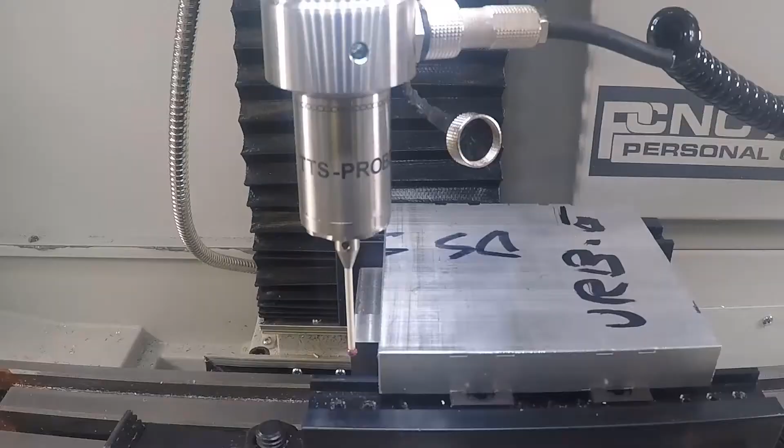Hey guys, I want to give you an update on the SOLIDWORKS part you sent over this morning. First, thanks for being a new customer. We really look forward to working with you guys on a lot more projects in the future. So I've got some good news. Your parts just left final inspection and they're headed over to shipping. We're able to cut your 2-day turnaround requirement in half. Your parts are scheduled to be picked up by FedEx later this afternoon, and you should have them sometime tomorrow.

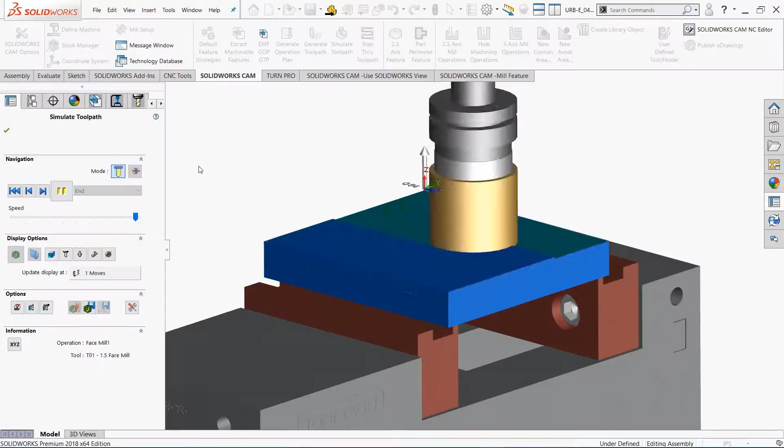So, by the way, thanks for sending me a SOLIDWORKS part. We use SOLIDWORKS for just about everything, and that includes CNC programming. When we get a SOLIDWORKS part, it really makes a difference in how quickly we can turn around a job. Hey, why don't I share with you some of the latest technology we use to get our jobs completed on time?

Man, this shop can be really loud. Give me just a moment, and we can continue in my office.

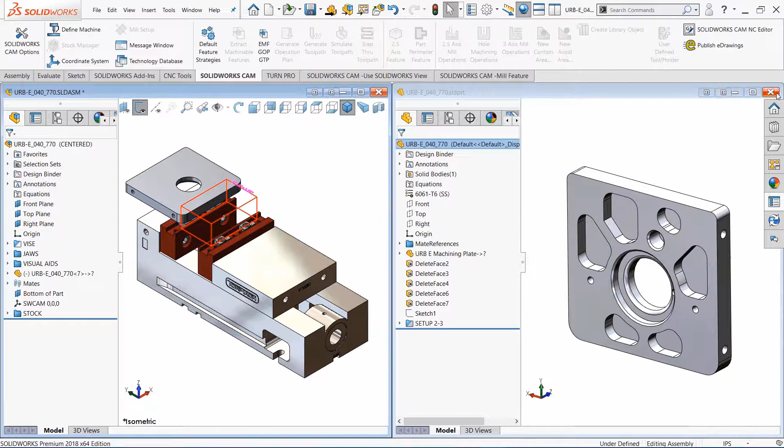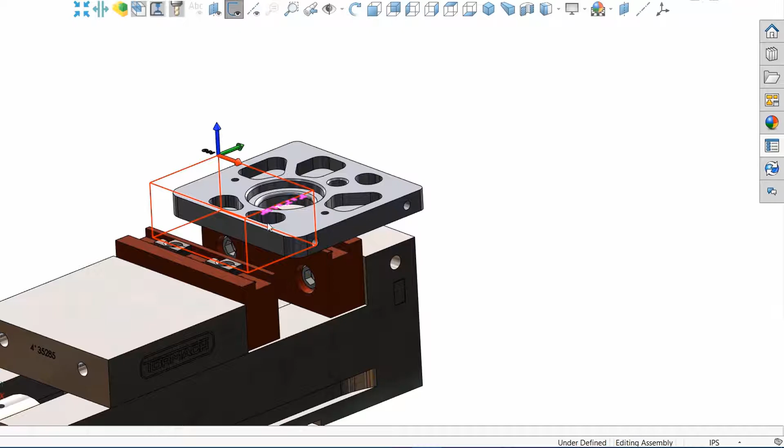Let's begin by using the power of assemblies to create the setup drawings for a machine shop. My vise inventory is modeled in SOLIDWORKS, as well as the different jaws that I use in my shop. Here I'm positioning your part in my vise for the first setup on the shop floor. Now I really love the width mate, and I use this whenever possible because it guarantees that when you change the outside dimensions of your model, and trust me, you will, my assembly drawing and CNC programs automatically update to keep the part centered in the vise.

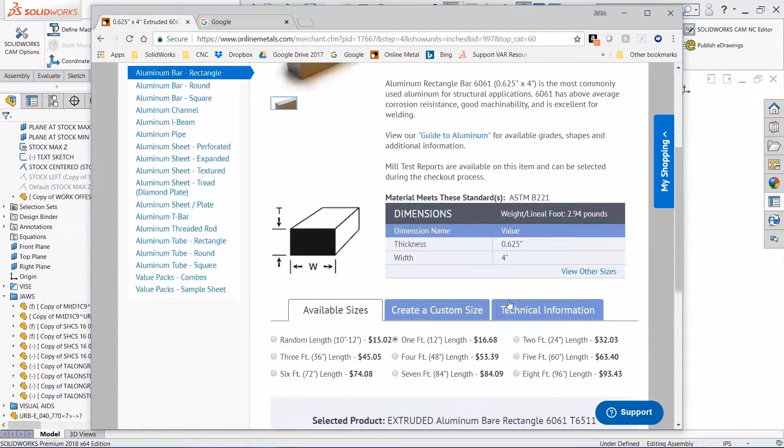Next, I'm going to calculate the size of the raw material that I need to order. I can do that with a single button click. I can check the prices online. Here I'm going to go to Online Metals, and I can go ahead and look up the exact size that I need. I can do this much quicker than my competition.

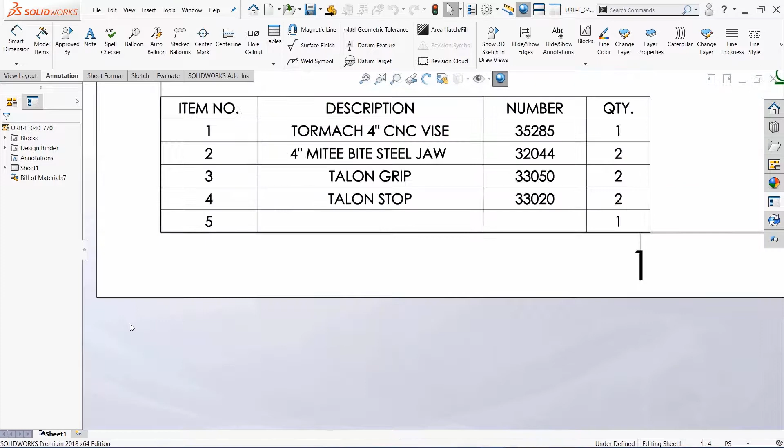So next, let's open up our shop drawing. It will now update to show and include your part. Our drawing has a bill of material, and it also has the machine zero location. Also, the Z-axis clearances for the Talon grips, and finally a title block that will contain all the required setup information for the shop.

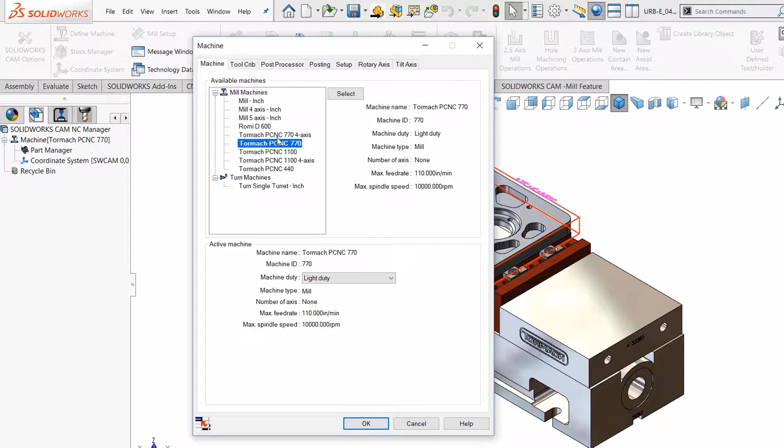The integration of CAM with CAD reduces my cycle times, eliminates translation errors, and guarantees the fidelity of my customer's intellectual property. So here we can select the correct machine tool in SOLIDWORKS CAM. We can choose the proper tooling package for aluminum and select the custom post-processor that I wrote for my machine. A great benefit for the CNC programmer is to be able to quickly view detailed information about the post-processor and the G-code required for the controller.

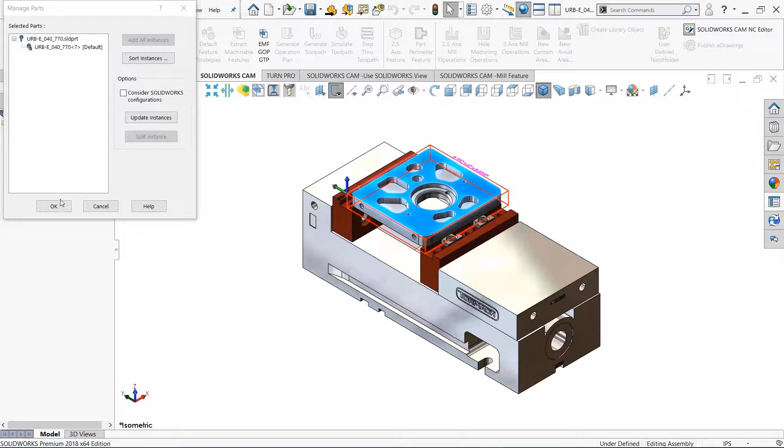So let's select our part to be machined. And then after that, we're going to go ahead and associate the stock that we sized in SOLIDWORKS earlier to the stock manager in SOLIDWORKS CAM.

So let's take a look at how SOLIDWORKS CAM handles a traditional CNC programming workflow. First, we're going to choose a tool to machine the fillet located at the edge of the through hole in the center of the part.

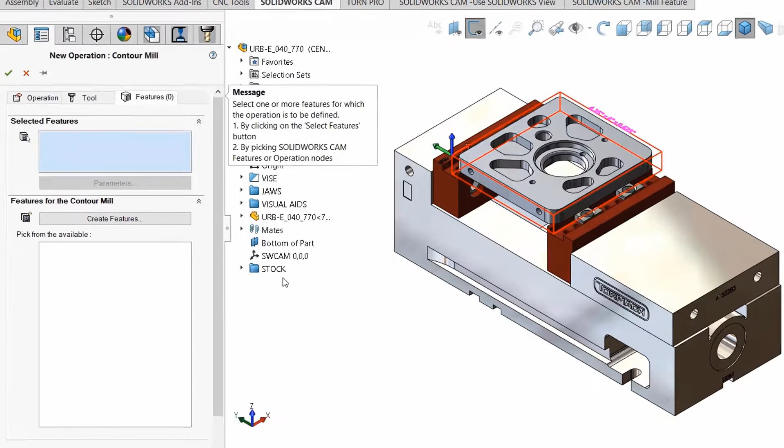Since this is our first tool path, we must identify the machining direction in Z, and then we can mouse pick the geometry to machine. First, we select the lower edge of the fillet, and next we select a face for the upper boundary for our operation. We can override the default feeds and speeds.

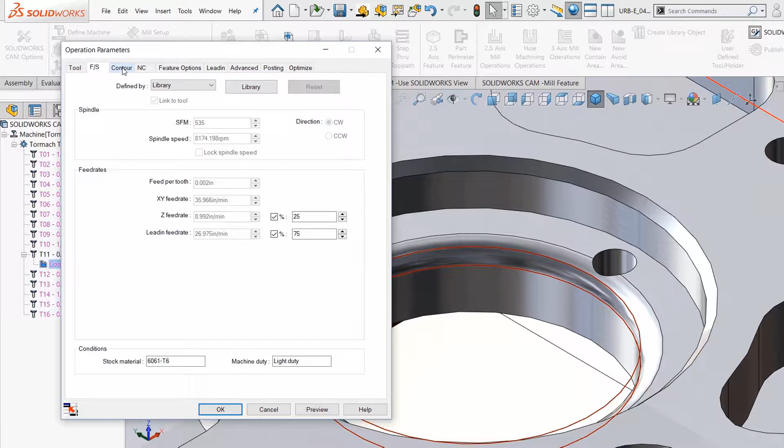We can select climb or conventional milling, turn on or off cutter compensation, and then choose the type of lead-in for our tool path. After generating our tool path, we can step through this a single block at a time if needed.

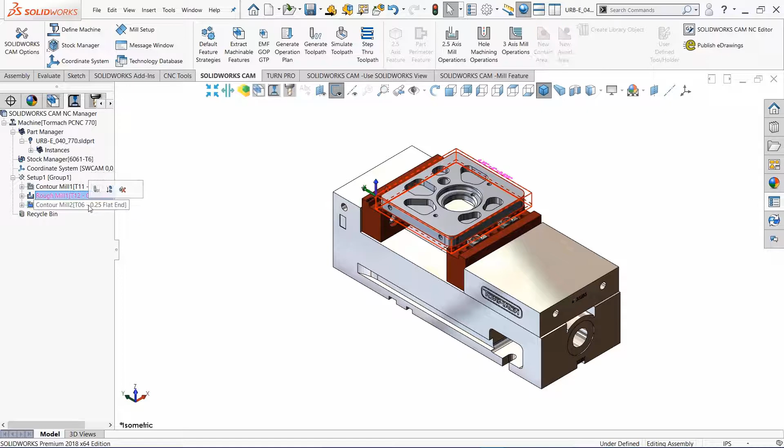Let's move on to interactive feature recognition, and this is where I begin to separate my shop from the rest of my competition. I can capture my customer's parametric design information in the form of intelligent machining features. Once captured, I now understand everything about the geometry to be machined, including size, depth, radius, material, etc.

With all this information, SOLIDWORKS CAM applies rules to automatically select the tools and the machining strategy to make the part. I've customized these rules to mirror my current workflows and processes.

So the toolpath simulation shows the rough and finish operations generated by my machining rules. The tool and machining strategy you see were automatically selected based on these rules. A huge advantage is that my way of machining is evenly applied automatically from job to job, providing consistency, saving time, and resulting in improved quality for my customers.

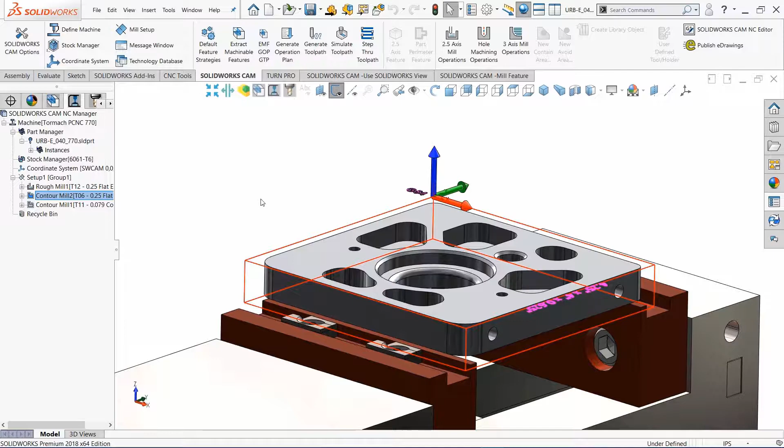So let's take a quick look at my rules-based machining database. Let's peek into the Features and Operations tab of the database. This is where 2.5-axis machining features, strategies, and operation-specific behavior is processed during both interactive and automatic feature recognition.

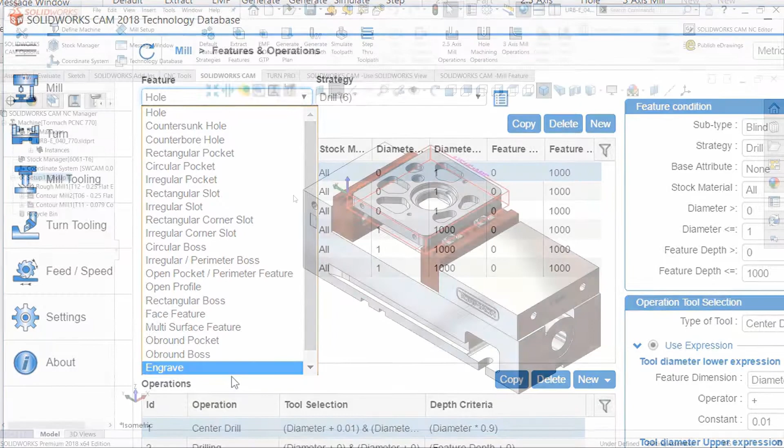And speaking of automatic feature recognition, let's use this powerful technology to program the remainder of your part. As an NC programmer, AFR is all about standardization and streamlining the programming process. By using rules-based machining, I can automate the repetitive and mundane work, which is about 80% of my daily process.

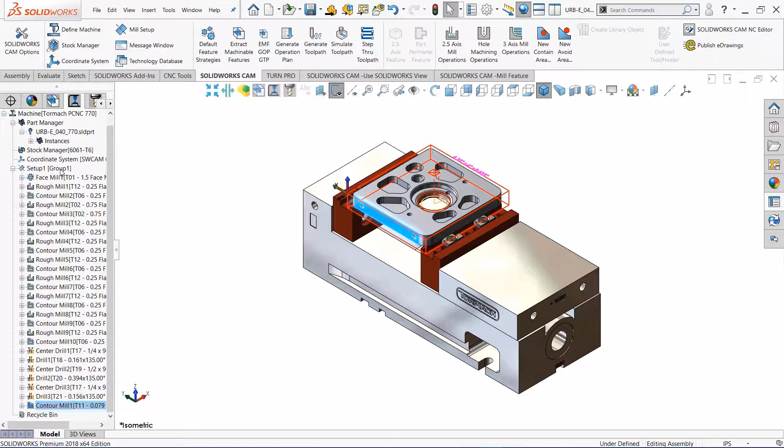This frees up my time to focus on what is important, and that is the 20% that's unique and requires my attention and more time to ensure a good product.

Let's take a final look at our toolpath simulation. It took just 13 seconds to finish programming your part. The feeds and speeds, along with the axial and radial depth of cut for each feature, have been used hundreds of times in my shop.

Which means I can place my spindle and feed rate override pots at 100% and let her rip. No more backing off the feeds and speeds during the first few seconds of a cut and wondering if my tool is going to break.

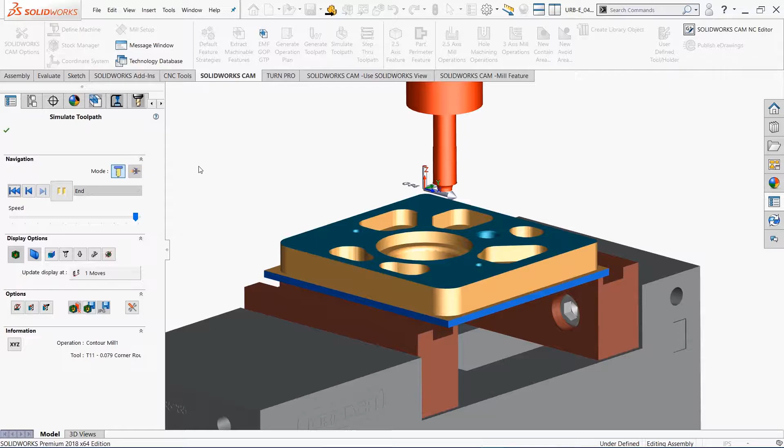So we're ready to post-process and create the G-code that will run our machine. A large library of post-processors comes standard with SOLIDWORKS CAM. After posting, the G-code file is automatically opened in the SOLIDWORKS CAM NC editor. The specialized editor also allows backplotting of my G-code file.

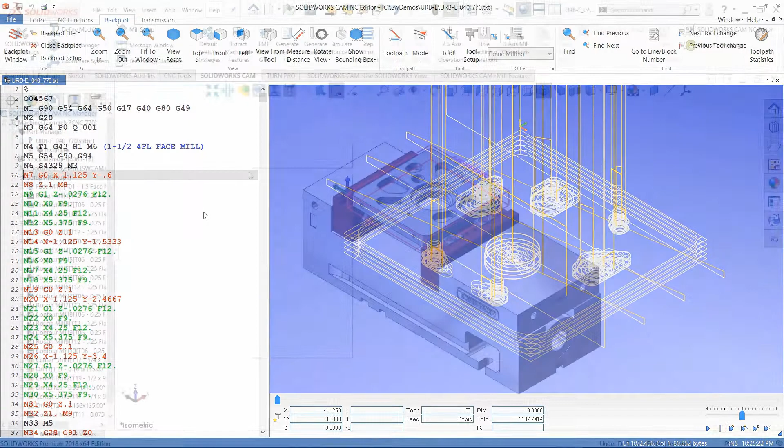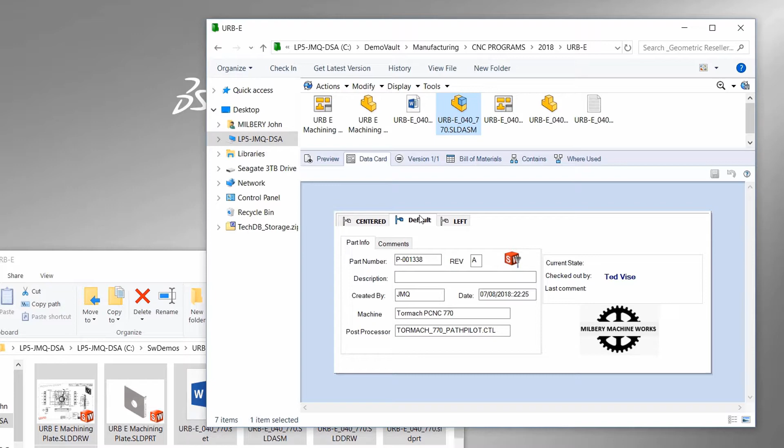Now, yesterday I told you that we were a SOLIDWORKS shop, and we utilize as many of their products as possible. This also includes PDM Professional. As a new customer, I go to great lengths to protect and back up your design information within my PDM vault. If needed in the future, I can pick up exactly where we left off and even version different variations of your prototypes as they evolve over time.

Machine shops like Milbery Machine Works take advantage of SOLIDWORKS CAM today, as it is included with every seat of SOLIDWORKS. With advanced feature recognition and automatic tooling sequences, you can speed up your machine programming process tremendously.